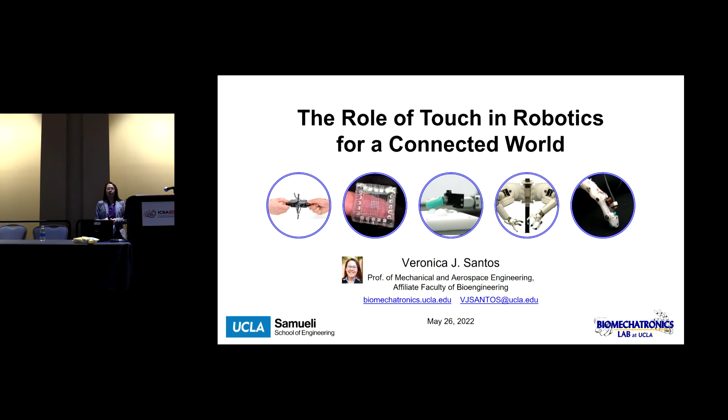First, I'd like to begin by thanking the organizers for giving me this opportunity to share our lab's, basically our students', work, and to share with you the handful of ways that we think about artificial touch in human-robot systems in a world that is increasingly connected by the internet, but also divided through unequal opportunity, socioeconomic status, and so on.

So I'd like to begin with just this array, showing off how many different groups have created artificial hands that can impressively perform many different complex motions. And if you saw Antonio Bicchi's amazing plenary this morning, then you also saw the soft hand, which sorry I don't have here. But the point is that we have hands that can mimic complex movements of the human hand. And what I would like to challenge you to think about is, what does that movement mean without touch?

And so I'm going to start off this talk with a little snippet from a 2015 PBS NewsHour segment on the science of touch. It just so happened that a collaborator of mine, current collaborator, Dustin Tyler at Case Western Reserve University, was in the same segment as my lab, but I'd like to show you the segment from his lab.

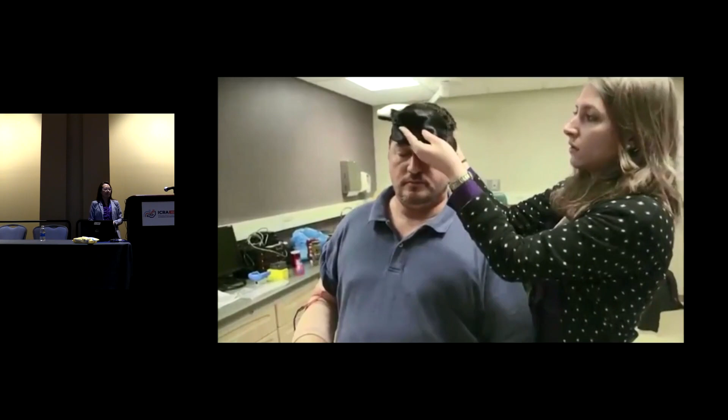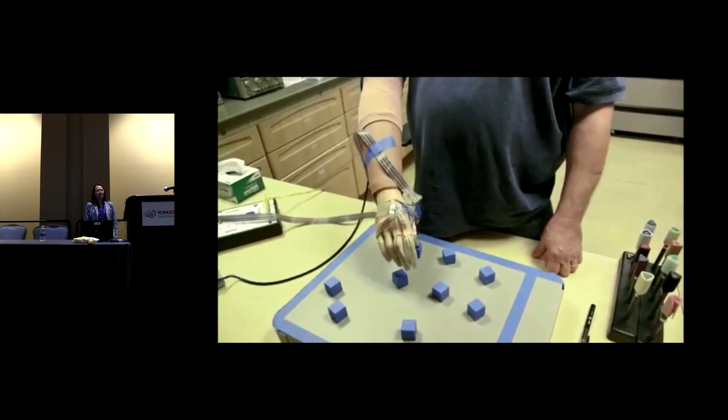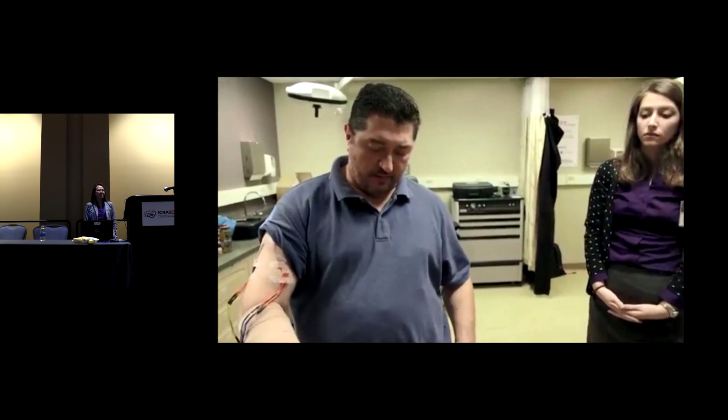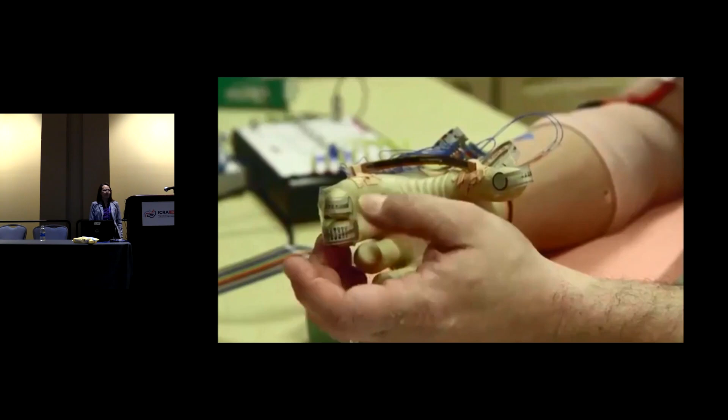Science correspondent Miles O'Brien had much of his left arm amputated last year after an accident while on a reporting trip for the NewsHour. He has since been exploring leaps forward for modern prosthetics. And feel free to adjust it as needed, okay? A hand without a sense of touch isn't really a hand at all. It's more like a pair of pliers. Watch blindfolded hand amputee Igor Spetic try to pick up some blocks using a prosthetic without a sense of touch. It's not very productive. That was no sensation. No sensation. And so you were just going blind. Just literally going blind. Yeah. Now watch what happens when the sensory perception is turned on. It's like night and day. But then when I grab it, if I grab it just right, I feel all three fingers. If I grab it right, or two fingers. Then I know I have it, and then I'll move over and drop it. Is it your phantom hand that you're feeling it in, or is... Oh, it don't feel phantom to me when I grab a block. To me, it does not. It feels like my hand. It feels like something between my two fingers that's vibrating. For Igor, who lost his hand in an industrial accident 4 years ago, something powered by a battery and made of plastic, metal, and silicone can become his hand.

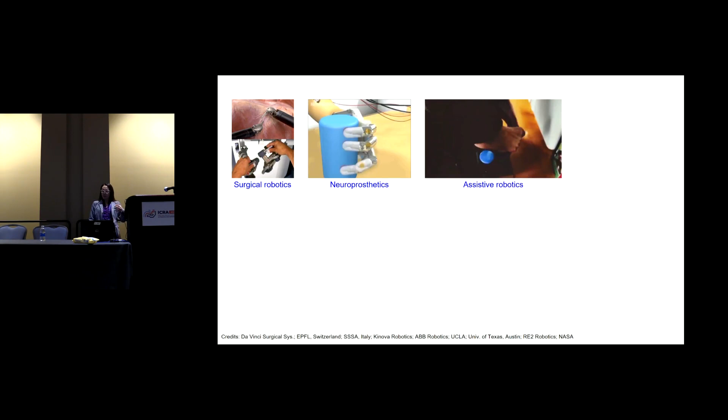So the first concept I want to leave with you is that touch is useful. And in a world where robots are physically manipulating, interacting with their world, whether these are robots that are operating within the human body, intimately attached to, connected to the human body, in very close proximity to the human body to assist with activities of daily living,

or in co-manufacturing environments, touch is important, as well as in extreme environments where you don't want to put humans because of the danger, whether it's search and rescue, handling of dangerous materials such as finding buried mines, or operating in glove boxes for nuclear decommissioning and handling of radioactive materials, deep underwater, or in space.

And for many of these applications, I like to think of the 80-20 rule. We can do amazing things. So many of the things that we've seen robots do has been driven by vision. But there are maybe 20% of these cases where vision can be obstructed or entirely absent.

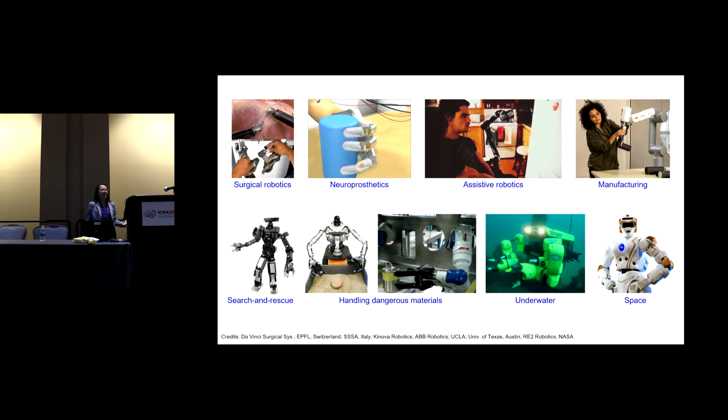And that's when I think that complementary senses, such as proprioception, understanding where our limbs are in space and the effort that we're putting in, as well as touch, can help to fill that gap when we don't have that direct line of sight, such as when you're tying your hair behind your head or putting on a bike helmet. Maybe your hand itself is occluding the object that you're manipulating.

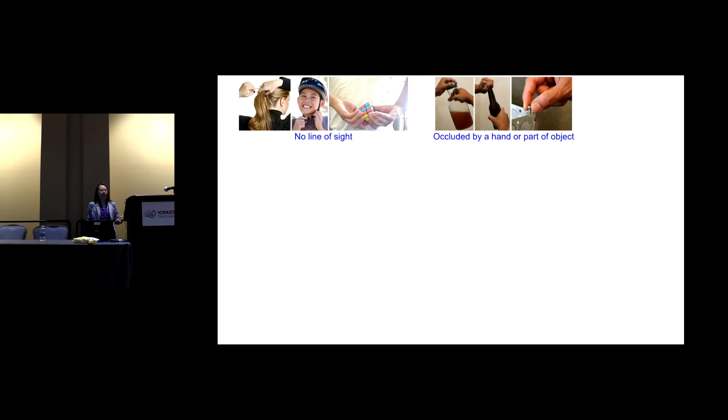In other activities of daily living, maybe you're reaching in the dark, fumbling around for that light switch. You're reaching behind obstacles inside your backpack, but doing it without looking. Right? And now you take it to more extreme environments. Imagine you're in an active wildfire. There's smoke. You have low visibility because you're in turbid water deep in the ocean.

And so I kind of showed this going to extreme environments, but you can also think about the challenges for extreme types of objects. And as our field moves away from always considering objects to be rigid to acknowledging that they're deformable, and maybe we don't have perfect models of them, consider deformable linear objects like rope or thin sheets, or even deformable bulk materials such as dough.

Now, what if you have deformable materials that are also animate? Right? They're doing things that you weren't expecting. And then I threw in in-hand manipulation here as a grand challenge for many researchers studying grasp and manipulation.

So the second point I want to leave you with is that touch is multifaceted. And if you saw the plenary this morning, then you know that there's a beauty to the 2,000 mechanoreceptors that we have in each of our fingertips. I only have this one slide to very briefly show you the complexity here, but you have superficial mechanoreceptors as well as deep. And within those two layers, you also have the fast adapting.

These are the types of mechanoreceptors that respond to transients, like slip or vibration associated with texture, as well as the slow adapting mechanoreceptors. They respond to slower, lower frequency change in shape. And we think a lot about that when we consider the deformation of the finger pad and relating that to local geometry.

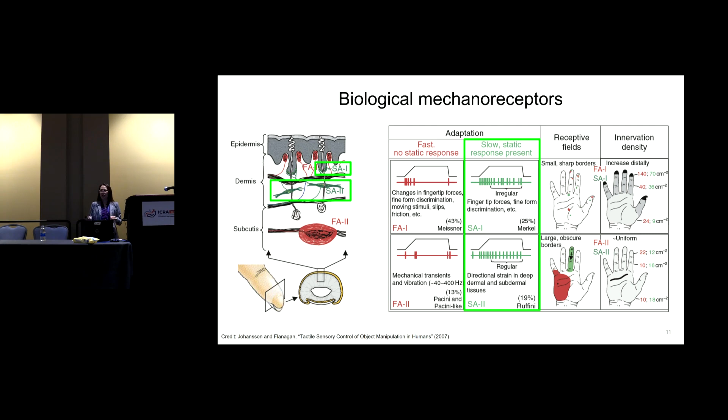So I'm going to show you over the next few slides a variety of the different tactile sensor embodiments that we've worked with, beginning with some low-cost, wrappable, piezoresistive fabric sensors. We've also looked at embedding barometers inside elastomer. Of course, this is inspired by the work pioneered by Rob Howe and additionally innovated by Matei Ciocarlie. But I have a long-standing collaboration with Jonathan Posner at the University of Washington. And we're making microfluidic tactile sensor skins.

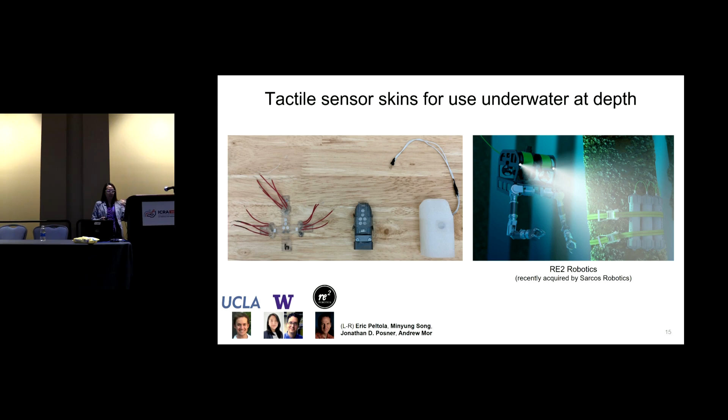We also have been working with camera-based elastomeric tactile sensors. Optical tactile sensors are not new. It's just there's a lot of renewed interest because of the advancements that have been made in manufacturing and miniaturization for cell phone cameras and the ability to put these into form factors the size of a finger.

So we have a collaboration with Ted Adelson, who helped to invent the GelSight, which is a camera embedded behind an elastomeric finger pad that's illuminated from the inside, and then you can also put an array of markers on the inside and track the optical flow.

And so one of the first things we wanted to do was test this tactile sensor in a granular media environment. And I'll come back to the granular media environment later, but one of the things I find so exciting about this is because tactile sensing is traditionally done in an open air environment, where it's very easy to tell the difference between no contact and contact.

But as soon as you plunge your sensorized fingers into sand, now you're stimulating everything, and the perception problem becomes one of distinguishing touch that you care about, like contact with a buried object, from all the other noise generated from just moving freely through the sand. And of course, our team has also picked up on the open source MetaDigit design and customized it by adding some finger pad markers on the inside and adapting it to multiple grippers.

So the final tactile sensor I'll tell you about is the SynTouch BioTac, and there's a little disclaimer. I worked on this when I was a postdoc at USC with Jerry Loeb. It was funded as part of the DARPA Revolutionizing Prosthetics program. It was intended to be bio-inspired and to go right on prosthetic hands. I also currently serve on the board of advisors.

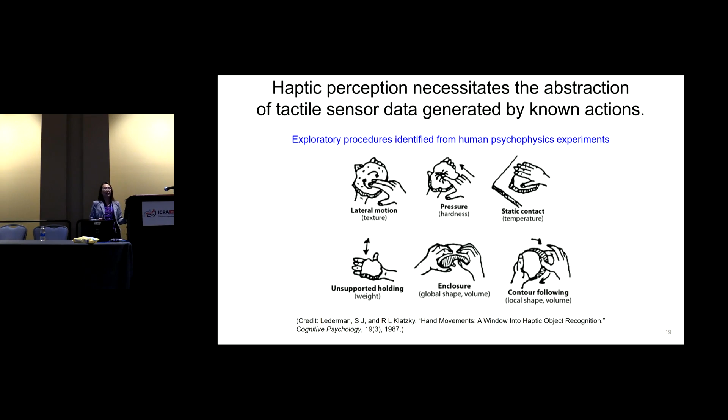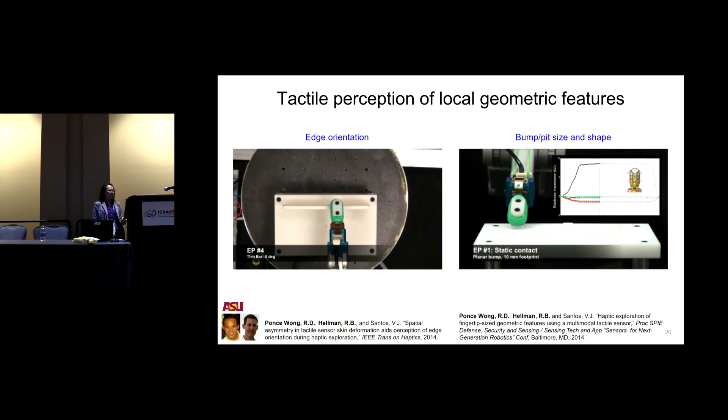So this idea of exploratory procedures, or EPs, was already in the human literature. And for our first entry out into machine learning, we basically replayed exploratory procedures on a sensorized robot hand. And we started with local geometric features, such as edges, the orientation of the edge with respect to your body. So imagine you're reaching into your pocket, and I'm sure that you can find the corner of your cell phone or the power button on your cell phone all through touch. So we were interested in local geometry, bumps, pits, sizes, shapes, things like that.

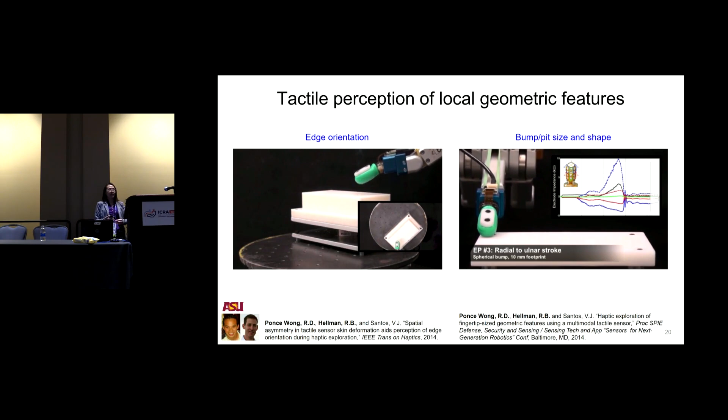Now, more recently, we've been thinking about tactile perception of directionality and inferring the direction of a force perturbation on an object that you have grasped. And this is useful if you want to do a handover without looking or set something down without looking at the support surface. And I'll show you a little bit under the hood of this particular project. First, you have to begin by collecting a lot of tactile training data. And instead of perturbing the grasped object, we held the object steady, and then we perturbed the finger relative to that. And then you just have to reverse that relationship. And so you collect hundreds, thousands of these different instances.

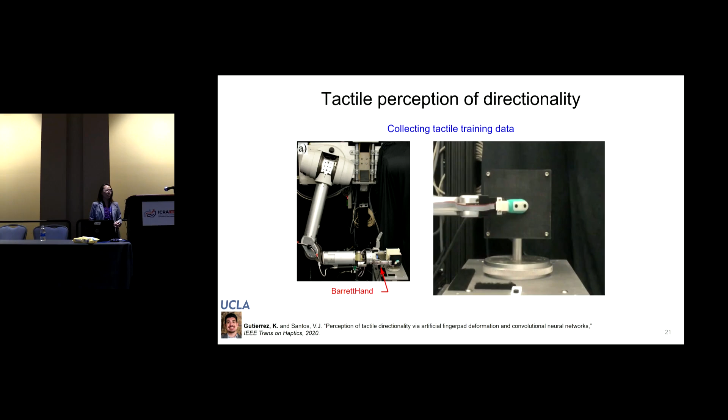And then we created tactile images from that finger pad deformation. Again, we focused on the electrode impedance, and we have 19 electrodes to work with, but we knew that they all sat within the same continuous volume of fluid in this finger pad. So we interpolated between them, made a grid so that we could have a square-looking image, and we basically take changes in impedance and map them to grayscale values. Now we have an image that reflects how the finger pad has deformed.

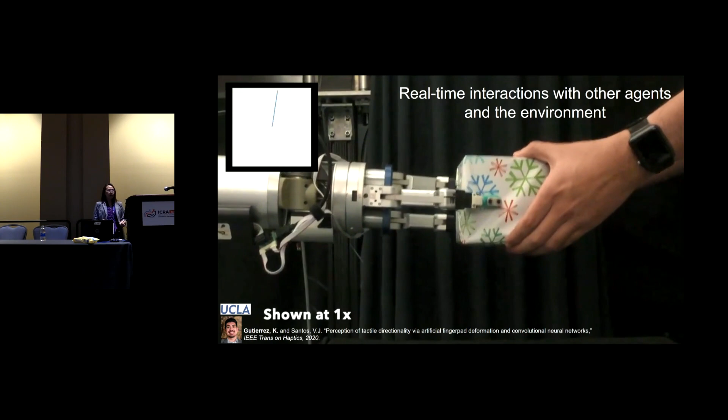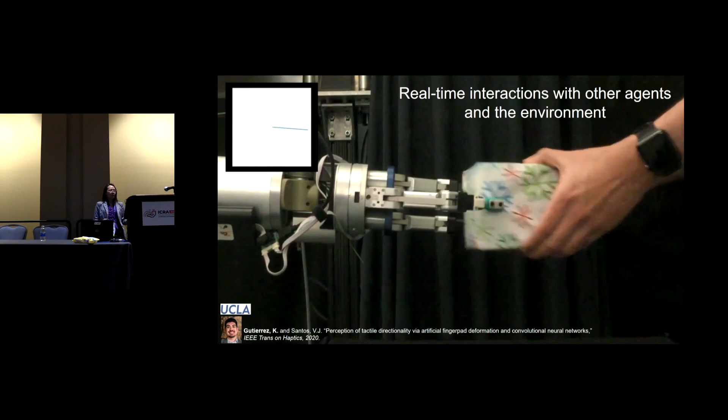So this robot was programmed to only release the object when it sensed a perturbation away from its palm, as if someone wanted to pull the object away. And then we also have an example where the robot is setting something down, and as soon as the robot senses an upward force due to the physical interaction between the glass and the table, it's programmed to release the glass.

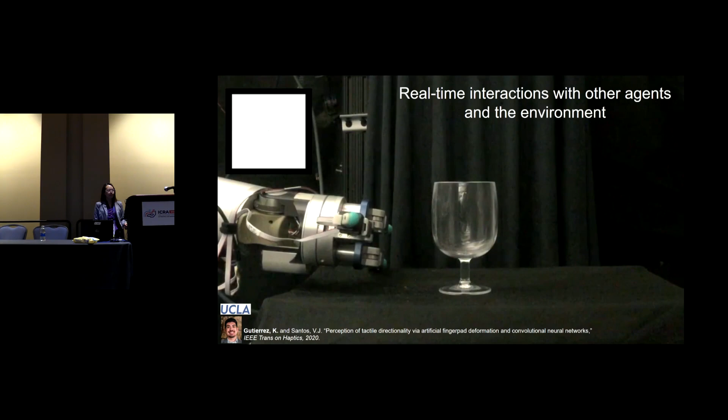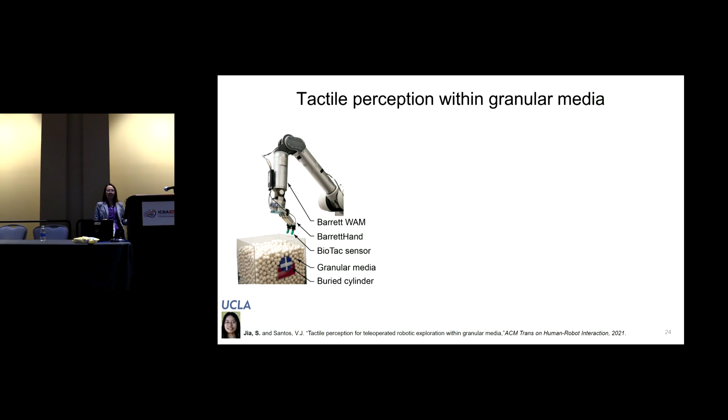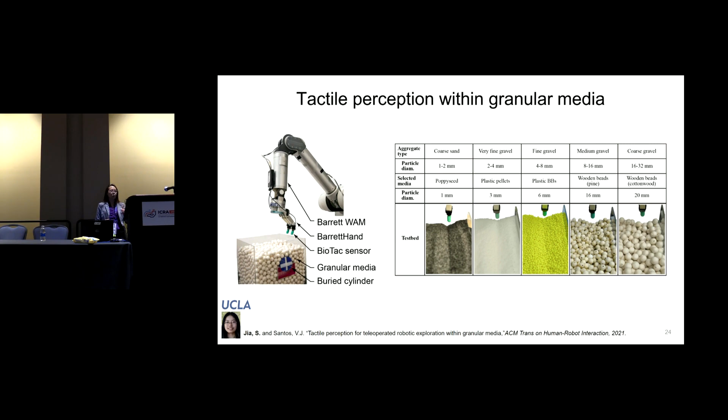But we have also been working on tactile perception within granular media, and this was one of the setups that we used. Basically, again, sensorize a robot arm, perform exploratory movements, and look at the tactile sensor data that we get, and then perform some mapping between those. And we did this for a variety of different granular media, ranging from coarse sand to fine gravel and coarse gravel in terms of size of the particles.

And we have a paper in revision right now that's looking at how to optimize the choice of the next exploratory procedure to further reduce uncertainty in a Bayesian Hilbert map in this new paper.

So one of the things that we found pretty interesting, we thought it was a liability at first, and now we kind of think it's an interesting thing, which is when you take a tactile sensor and you put it in a granular media environment, the granular media can act like a liquid or a solid. It depends on how packed the particles are, how forcefully and fast you're moving through those particles.

And so as you move your finger through, some particles are going to move out of the way, but there are going to be some particles that are part of this soil failure wedge that moves ahead of the fingertip due to jamming. And when that front of granular media contacts something that's buried, it will actually trick your finger into thinking that you've touched something. But in actuality, it's the granular media particles jamming, forming force chains, and transmitting force from that object that's not even touching your finger all the way back to your finger.

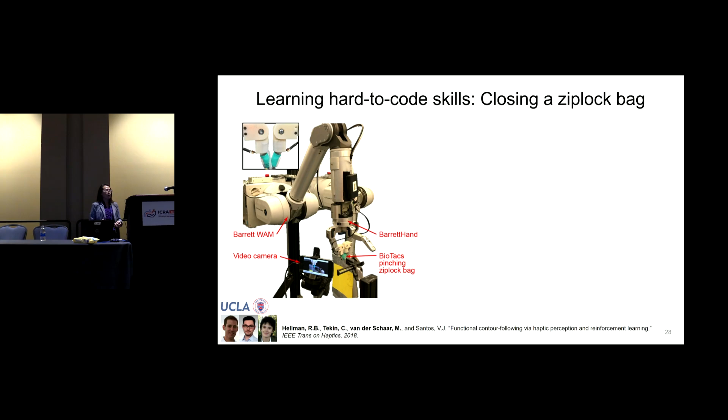So the video on the right is just showing that if you took a naive approach and you looked at the angle of the zipper and said, oh, I'll just follow the zipper in a straight line, that does not always work. You really do need some closed-loop tactile perception because the object that you're manipulating is moving and changing its state every time that you're moving relative to it.

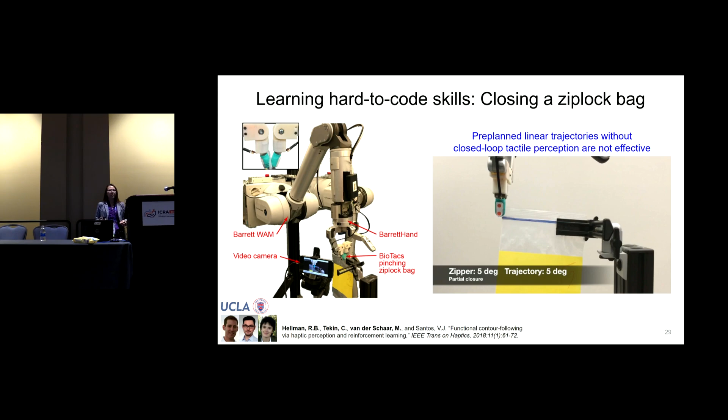And so we set up a simple reinforcement learning algorithm. Of course, we have to define our states and our rewards, and we did it very simply using our physical intuition.

We said, okay, we probably want to keep the contour, the zipper, in the middle of the finger pad, because if it gets too close to the fingertip or too high up, we will lose grasp of the zipper. So let's give rewards for any action that keeps the zipper in that center sweet spot. And then based on some preliminary studies, we had this 5-dimensional action space that's somewhat biased, but these are the only 5 things that the robot can do with each incremental movement.

Now, in this study, we were comparing Q-learning as a benchmark to contextual multi-arm bandits, but the point is that we were trying to balance exploration and exploitation while learning this policy in a very resource-conscious manner, because we don't have infinite trials to learn this because it is so expensive to do things with touch.

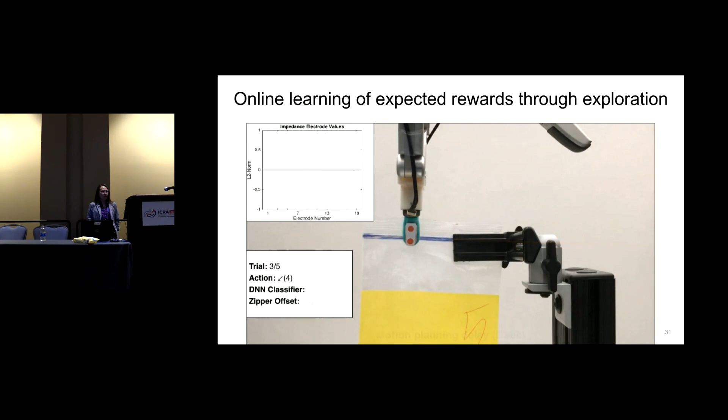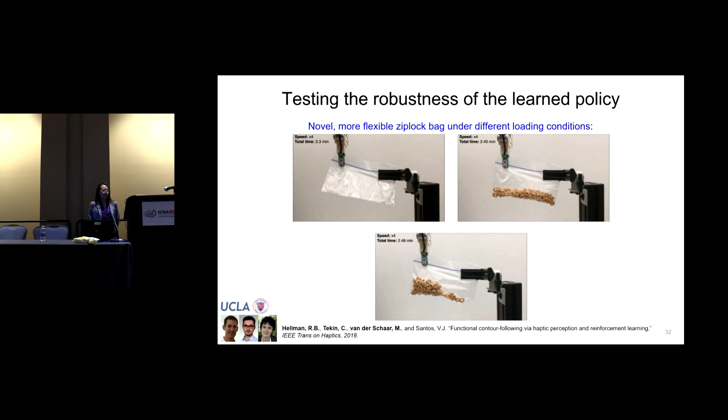Now, the second skill that we recently are publishing on is flipping a notebook page, which is something that I think we all take for granted when we're reading. But the point of this task was not to demonstrate and learn a kinematic trajectory, but to learn what it feels like to do a task in the quote-unquote right way. And we had to artificially decide what was ideal or right in order to specify a reward function. But we wanted to do this as an example of how you could learn to tune dynamic motion primitives using reinforcement learning driven by touch.

So this time we used a Kinova arm, again sensorized with the BioTac. We had a binder with motion capture markers attached to it. We set up our reward function, and really the creation of the reward function is where the art comes in. It requires physical intuition, some expertise, some preliminary data to understand where the tactile signatures might be hidden in your data. And our reward function was set up to be a function of the internal fluid pressure, the electrode impedance, or how the finger pad is deforming, as well as a penalty if the binder was moved too much.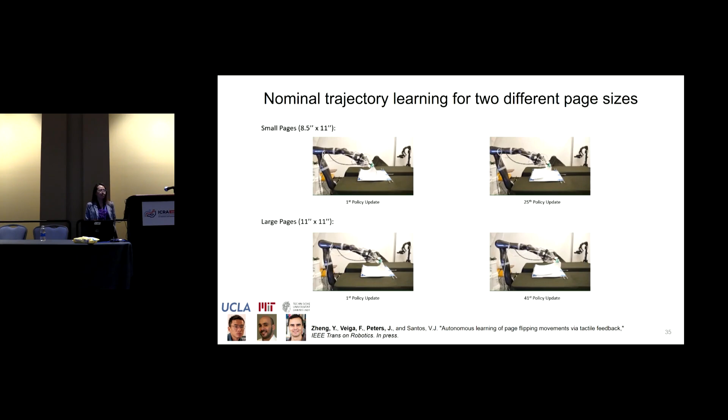So far I've shown you things that robots can do to feel and to use that information to make semi-autonomous decisions, but I haven't told you other things that you can do with these data, which are to share them with human operators. And so via the internet, via direct connection to the human nervous system, you can share touch in whatever manner that you choose.

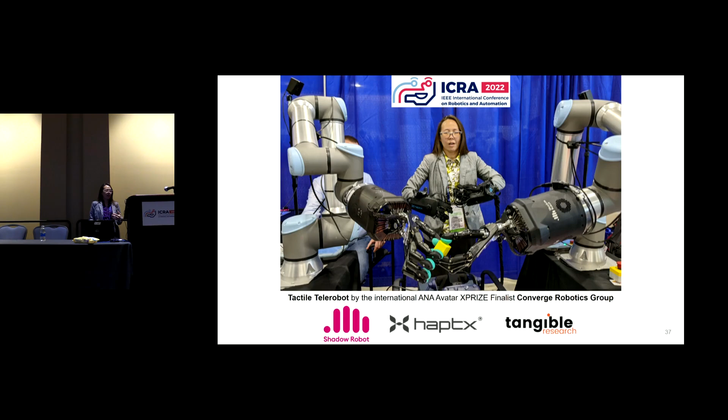And I thought it'd be nice to kind of bookend the talk with 6 years later, a follow-up on Dustin Tyler's lab. Now he has established the Human Fusions Institute, of which I'm a part, to show you how far they've come with their peripheral nerve interfaces.

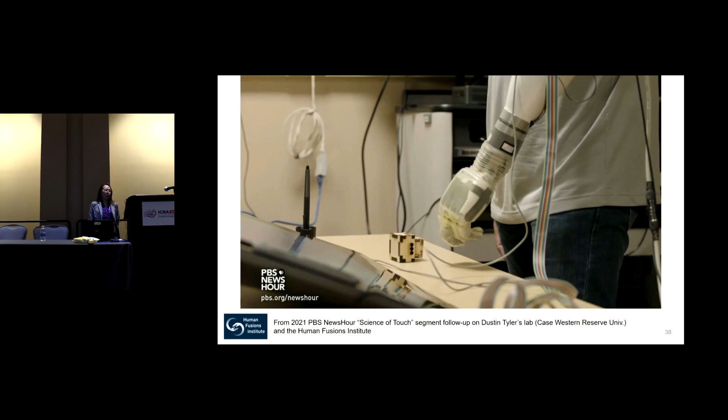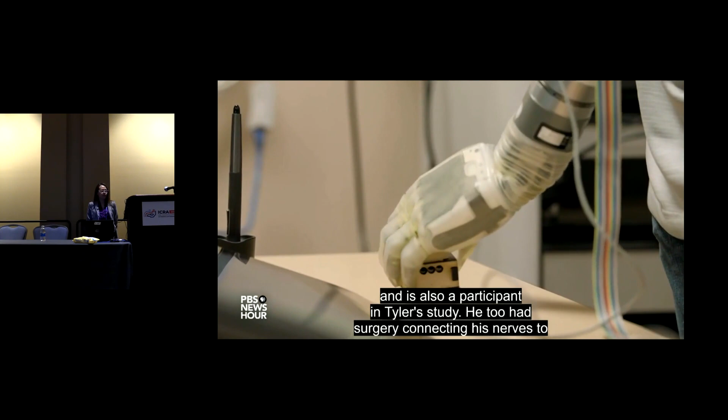Brandon Prestwood lost his arm in a workplace accident in 2012 and is also a participant in Tyler's study. He too had surgery connecting his nerves to sensors in the fingertips of a sophisticated prosthetic limb. Basically, they've mapped where if they put this electrical signal to this contact on the nerve cuff, then that makes me feel a pinprick in my index finger.

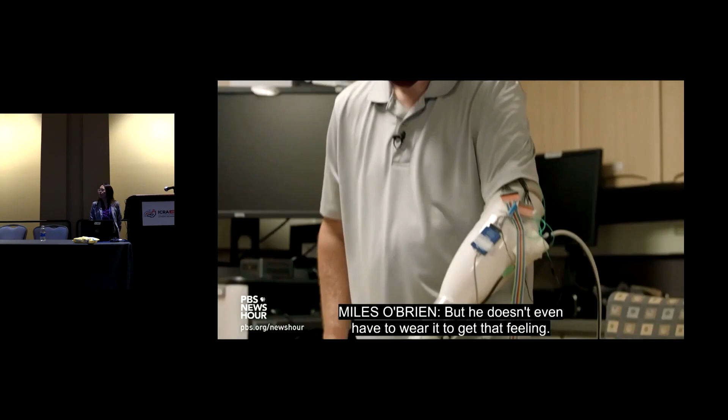But he doesn't even have to wear it to get that feeling. The fact it's attached to his arm is actually kind of arbitrary. We can put the prosthesis anywhere in the world, and he would still feel like his hand. Prestwood is trying out the idea with his prosthetic arm mounted across Tyler's lab. And so now we can extend his capability.

We can essentially amplify the person by taking that sense of connection, the sense of touch, and putting it on any machine in any part of the world and bring it back to your nervous system. And then I can connect it to devices that can do far more than my weak biologic system.

So I met Dustin a long time ago when I was a postdoc, and I was inspired to follow this career path because of my interest in upper limb neuroprosthetics. And years later, we reconnected at a DARPA meeting, and I said, hey, how's your DARPA haptics program going? He said, oh, it's winding down, but I have all of these individuals with limb loss, and they have their peripheral nerve interfaces, and we can stimulate them. And I said, well, that's great, because I have a bunch of robots in my lab with tactile sensors. Can we begin a collaboration?

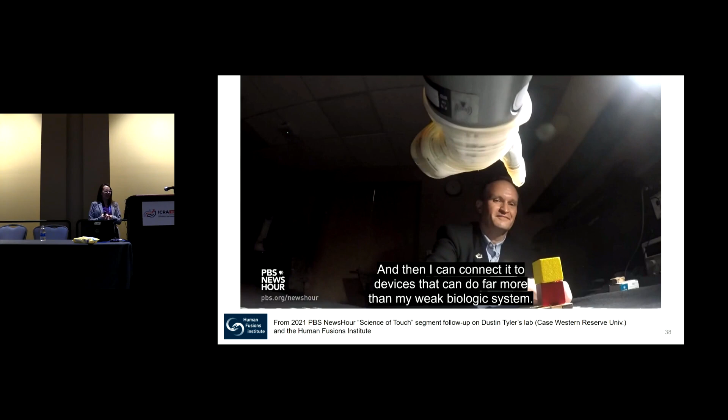And so that has led to the last part of my talk, which is really about touch as a means for connection. Because most of my career has been spent on thinking about artificial touch from the perspective of just completing a task. What kind of information do you need to complete a task, to complete it efficiently, but without consideration for the social meaning of touch, which I think many of us can appreciate after the pandemic. And the field of affective touch is hardly new, but it's something that I've been recently getting into, and I'm very excited about as part of a next phase of my career.

So touch is connection, whether you're connecting with a newborn in this world, or a partner, a significant other, or even at this conference, right, with the different comfort ribbons, there's still something meaningful in that elbow bump. Otherwise, you wouldn't do it. Even the elbow to elbow, there's some social connection in that physical interaction between humans, and I think that's really interesting.

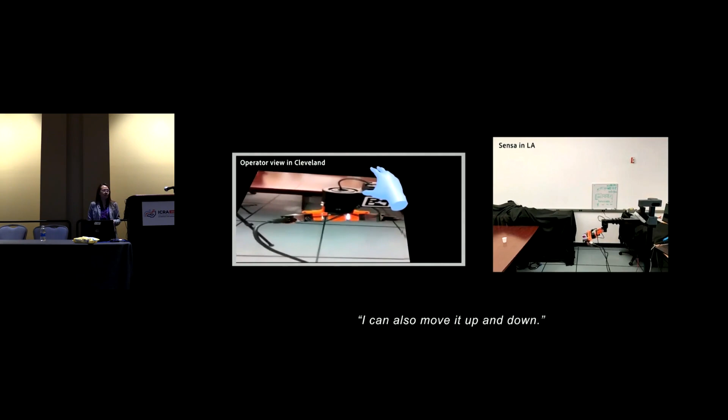I can also move it up and down. Could we do a touch test, please? Yeah, thumb, index. Cool.

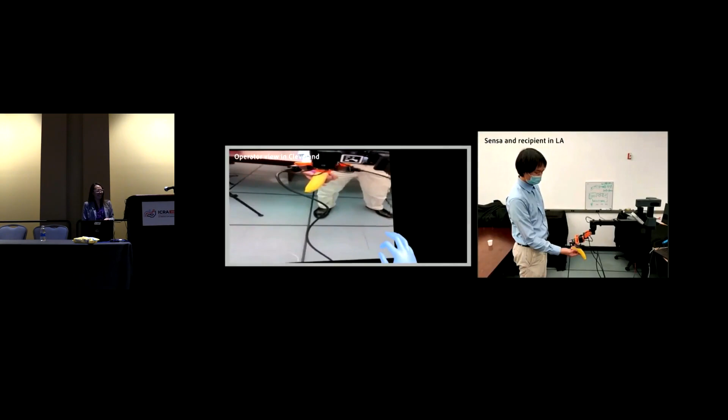So there's their handshake. The recipient and operator can also work collaboratively through the avatar system to perform shared tasks. Cheers.

It was a very unsatisfying toast because no one actually got, at least Luis didn't get to drink, but we fixed that later. So fast forward a few months, we made it to the XPRIZE semifinals, and that's where most of our team members met for the first time, and it was an amazing bonding experience. I mean, we just gelled, and there was some trial by fire, there was some staying up till 3 a.m. It was good. Probably not for Lionel and Luis, but it was a lot of fun.

And this is Dustin Tyler doing some preliminary testing, and the two things that we focused on, in addition to using a robot platform that is human safe, small footprint, easily deployed, was eye contact and touch. Because when we're interacting, I think a lot of the social interaction happens through eye contact, and you know where your hands are, but I'm not really paying attention to what my arms are doing while I'm talking. So we really focused on those two things, even though we were using a robot that we knew was not anthropomorphic.

Yeah, I'd love to. Nice to meet you. Very nice to meet you as well. Welcome to LA. It's good to see you. Thank you. Pleasure to be here. Oh, that's great. So I'm curious to see how well can you move your hand? Can you flex your wrist?

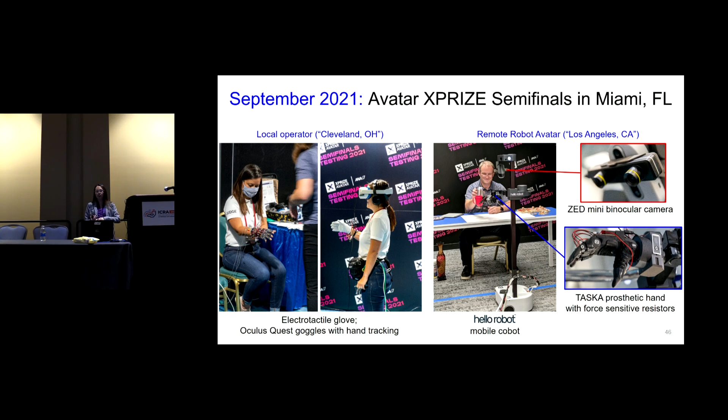It's a little unnerving. So, it really does convey a human presence because there's something unique about a human embodying a robot with the natural tremor, natural movements, the fidgeting, as opposed to something that's very smooth and still and pre-programmed. We also added a TASKA prosthetic hand that had some very simple force-sensitive resistors, additionally on the palm, so that we could also stimulate on the palm.

So our journey ended at the semifinals, but I'm very pleased with what we did because we got to come together. We had a shared goal across multiple institutions with a hard deadline, and now we are just a really strong collaborative team, and we're pursuing other collaborations in healthcare robotics, manufacturing, and so on.

And we were very honored to be part of the dozen of researchers that Cynthia Gorney interviewed across 4 countries as part of her cover story on the power of touch. So if you're at all interested in touch, this should be hitting newsstands any week now. This is the June 2022 issue on the power of touch. Beautiful photographs by Lynn Johnson. And it's not just about task-based touch, but they talk about the social aspects of touch as well.

So instead of leaving you with a list of challenges, I thought I would flip it and leave you with some things that I think are very exciting directions that researchers are pursuing related to touch and socio-physical interactions, which I'm newly interested in. So the first one related to touch is, I know there are groups working on combined proximity and tactile sensors, and I think this is a very exciting area. Because you can use cameras, but I think the proximity sensing directly in the fingertip allows you to do a lot of pre-touch planning. And in the same form factor as a tactile sensor, it's very elegant and efficient.

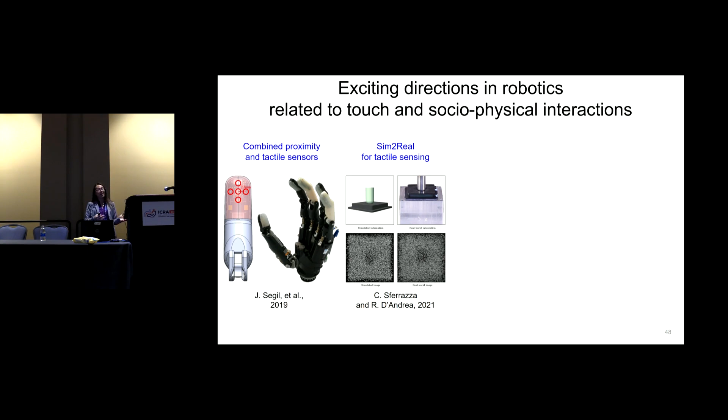I also think that sim to real, especially for tactile sensing, is sorely needed. Because like I said before, tactile sensor data are very expensive to collect. If we could simulate the contact, the deformation of the finger pad, and learn in simulation, and then transfer that learning to hardware, that would be amazing.

And finally, robot avatars that enable inclusion and full participation in society, in the workforce, in the local communities, in schools. And so I heard about this robot cafe in Japan where people with disabilities who are at home can be employees at this cafe. They remotely log in to these robot avatars and they serve customers. And I think that's amazing, and I think that there are more studies that are needed about human-human interactions and human-human social dynamics, but through a robot.

Because, in person, you and I, we understand personal boundaries, peripersonal space, the ethics of how you interact with others. But it's different when someone is inside a robot and it's not just a robot that can be bullied or whatever. There's someone in there. And so I think that studying those human-human interactions through an embodiment that is not flesh and bone is something that is to be looked at.